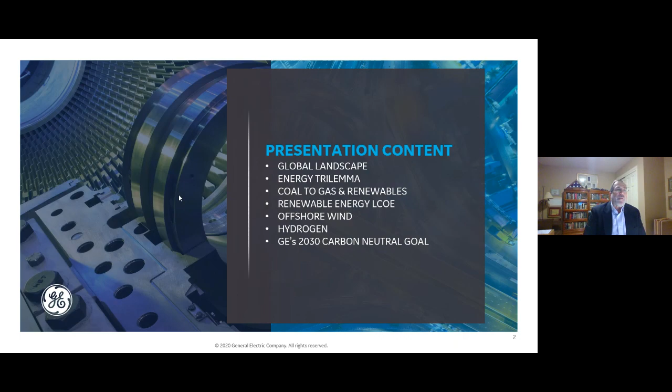And then Ruslan will take over for a little while, talk about renewables, the LCOEs, the levelized cost of electricity perspective of renewables, and then a little bit more about offshore wind. I'll come back on and speak briefly about hydrogen, and then we'll talk about GE's 2030 carbon neutral goal. Okay, so with that, just want to do a little bit of stage setting here with where the world is today. And most of the slides that I'll present really talk on a global basis. I do have a few specific regions, but for the most part, we're talking on a global basis.

So you can see roughly 35 gigatons of CO2 emitted globally. The power generation sector being the largest single contributor to those CO2 emissions at roughly 41%, followed by transportation and industry. And then with respect to how that power is being used, currently generating about 27,000 terawatt hours of electricity. But with that tremendous amount of electricity that's being produced, there are still roughly 770 million people in the world who lack reliable access to electricity, primarily in sub-Saharan Africa, South Asia, Southeast Asia. So still a tremendous number of people without power or access to reliable power.

And on top of those people without access to electricity, there's also about 2.5 billion people who lack access to clean cooking fuel. So they're relying on whether it's wood, dung, coal, whatever, for cooking purposes. So again, a tremendous source of CO2 emissions, and really an example of an opportunity where if we increase electrification of the cooking sector, as one simple example, we can really reduce carbon emissions globally.

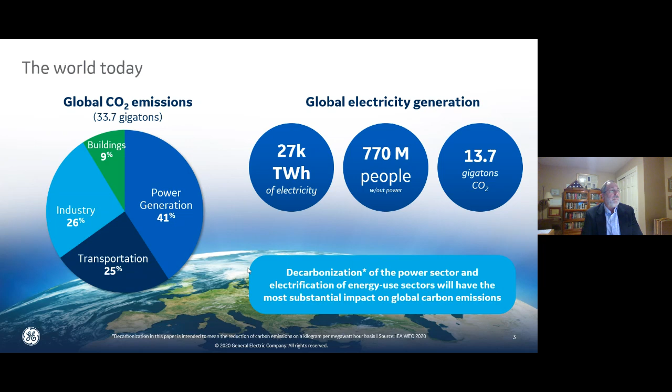Interesting to note that most of them, quite frankly, don't have a clear path on how to achieve those decarbonization goals. They look at their portfolio, they have some ideas, but to get to carbon neutrality by 2050, they're not quite sure how to do that. And really, technology is going to play a key role in enabling them to achieve those goals. And we see hydrogen and carbon capture and sequestration as clear pathways to help decarbonize the gas sector. And we'll talk some more about that and some of the opportunities that we see to decarbonize gas power.

So clearly, the global energy landscape is in the midst of a grand transformation. As Connor mentioned, I've been in the power industry for quite some time. I got my interest in the power sector spawned from the Arab oil embargo back in the 1970s. Quite frankly, I was a teenager at the time, and it was really interesting to see the impact of the Arab oil embargo on the U.S. and people pushing their cars to gas them up at stations and having rationing of gasoline. So that's really what spurred my interest.

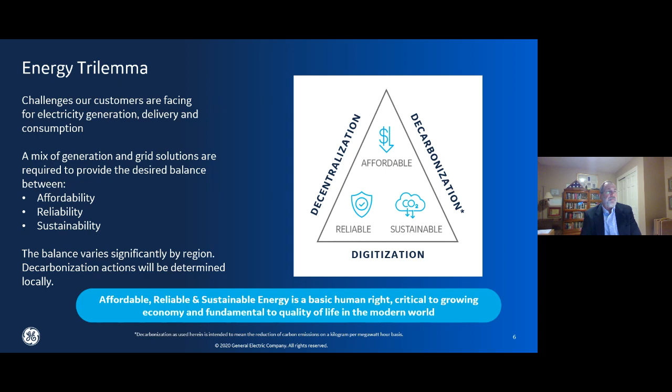Gas is going to play a vital but changing role. It is dispatchable, affordable, and reliable, and lower CO2 than coal, which is the #1 source of power generation today. We see storage and hybrid emerging and really starting to enable baseload dispatching of renewables. We think nuclear will remain a key source of zero carbon, and we have expectations that small modular reactors will bring costs down significantly in that space.

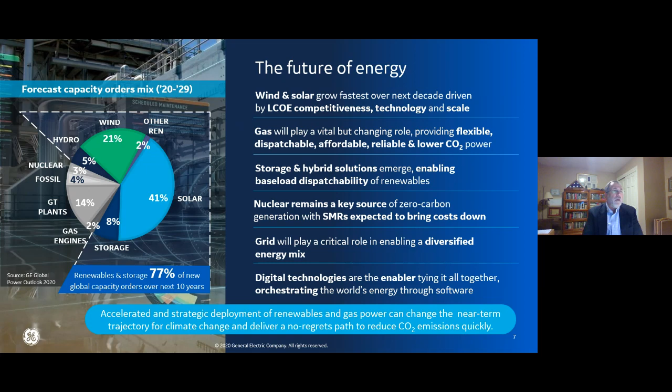But in any event, you can see a couple of key points. Today, renewables, at least wind and solar, are about 16% combined of the total global capacity. You can see coal is about 28%, gas power about 24%. Going forward, there's not quite a doubling of electrical capacity over the next 20 years, but you can see the tremendous growth in the solar space, where it becomes 27% of installed capacity, wind becoming 14% of installed capacity. Interestingly enough, coal still remains at 14% of installed capacity and gas at 19%.

But I think the more interesting story is when you actually consider the generation mix. So again, in 2019, wind and solar PV combined are about 8% of the generation mix of the total 27,000 terawatt hours of generation. Coal is still the number one source at 37% of generation, and gas about 23%. And how that evolves, we have tremendous growth. We have about a 50% increase in the amount of generation over the next 20 years.

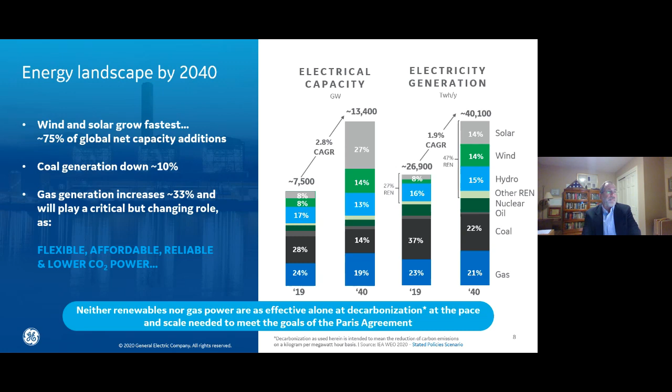This is an example in the US of what we think is a real success story. Now, again, there are some very unique circumstances in the US that were able to drive this dynamic of the power sector CO2 from its peak in 2007 has come down about 33%. When I talk about that unique combination of things, we have a tremendous installed base of coal power, and we're blessed with very, very strong natural gas reserves.

So coal during that period went from roughly half of total power generation, or electricity generation, down to 24%. So basically cut in half. And by the way, all of this occurred while total generation was fairly constant at about 4,300 terawatt hours. Gas nearly doubled from 20% of total generation up to 37%, and wind and solar more than quadrupled, going from 2% to 9%.

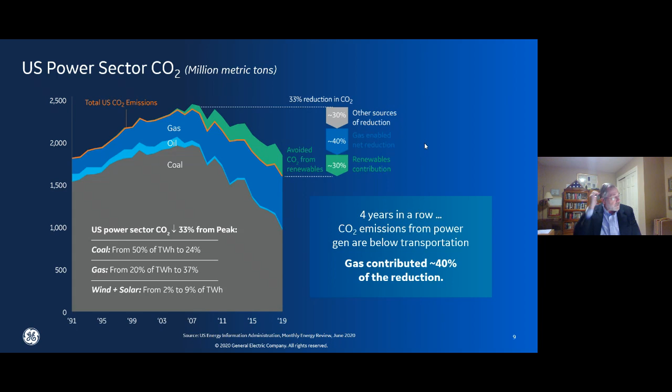GE's HA combined cycle, over 60% efficiency. Basically, those machines are capable of reducing that carbon intensity by about 60%. If we were to burn a mix of 50% hydrogen, 50% natural gas in those HA combined cycle machines, that CO2 intensity would come down roughly 69%. And then if we went to an HA combined cycle with about 90% carbon capture, which is kind of a practical limit of carbon capture, that would come down 97%.

And of course, if we were to burn 100% hydrogen in an HA gas turbine, we would eliminate the CO2 emissions entirely. Key is that some of these technologies are capable today, and some are retrofittable in the future. As an example, our combined cycle machines today are capable of burning 50% hydrogen. We are working towards getting that up to 100%. So again, we really see hydrogen and carbon capture and sequestration as viable pathways to low or zero carbon in the power sector.

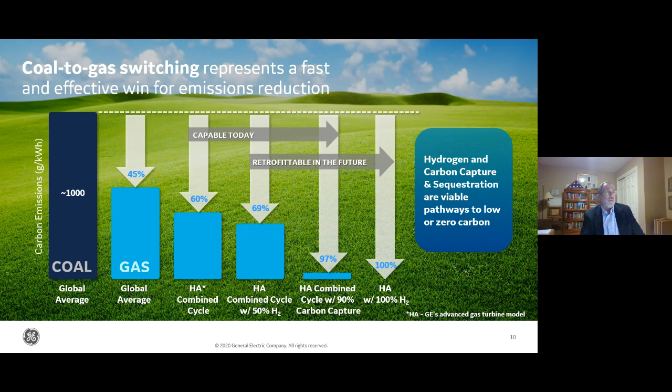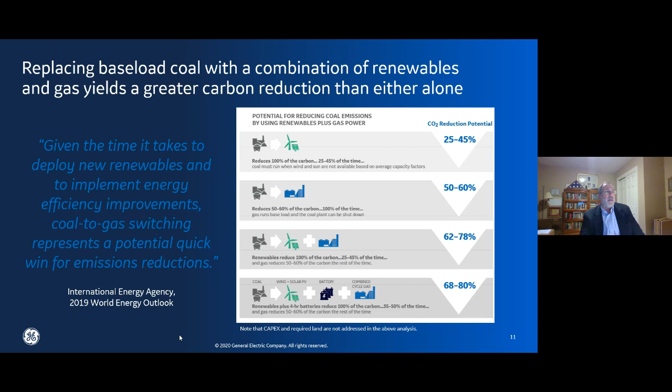You're on mute. Thank you, Jim. Hello, everyone.

I'm very glad to talk about GE energy transformation today. For those who don't know me, I am also an alumni, and it's been 10 years since I graduated from this course, and I'm very pleased to talk about transformation of the energy sector. And we, as a company, GE, also follow that. Several times we've talked about this topic to Imperial students, and today I'm going to talk about GE Renewable Energy and obviously the offshore wind business where I'm working.

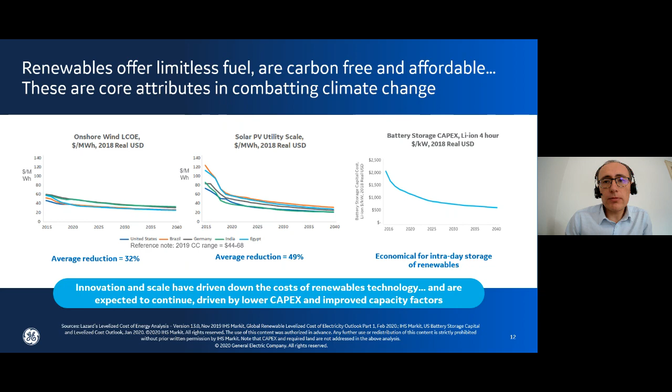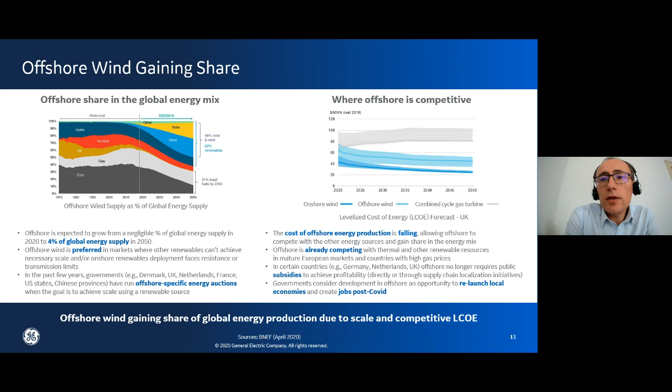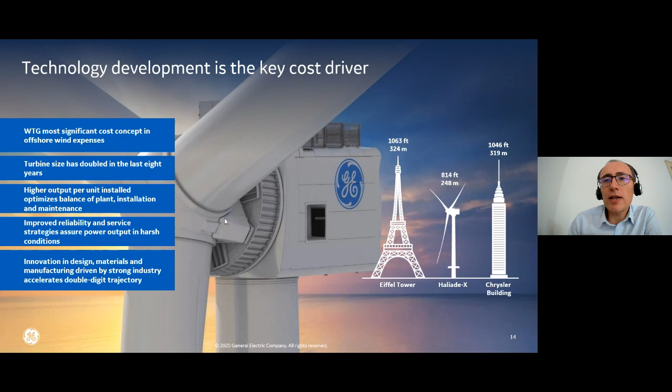And this is to do what? To reduce the cost of electricity and make renewable energy and clean energy affordable and sustainable. And I'm glad to be working at GE and being a part of it, because this is a long-term journey and GE is part of this transformation.

So just to finish my part of the presentation, we talk about hydrogen as part of the big change. Recently in Holland, an offshore wind auction was announced where you have a 1 gigawatt offshore wind farm producing green hydrogen, with Shell and Eneco. And in that sense, I'm going to hand back to Jim, who's going to talk about hydrogen and GE's commitment to carbon neutrality. Thanks, Ruslan.

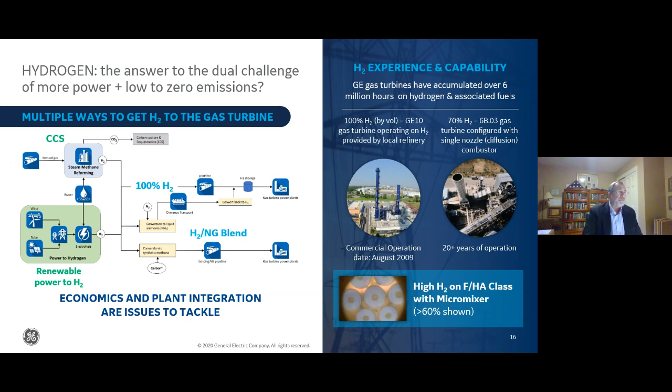So with that, I just wanted to talk again very briefly about GE's carbon neutral goal. We recently announced our plans to have carbon neutrality in our own operations by 2030.

It was, you can imagine when we have very diverse businesses, quite a challenge, but we brought all the businesses together and are willing to make that recent pledge.